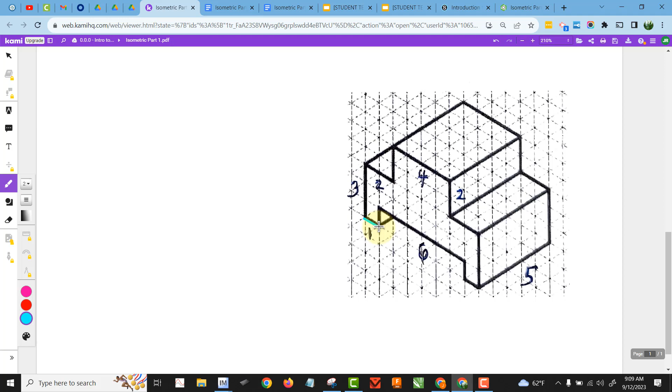Here's the first part we're going to make. It's shown drawn in an isometric view, and our strategy is going to be to make a two-dimensional sketch along the front face here. So we're going to come along here and we're going to draw this as I'm showing right now. And we're going to make sure it's the right size and has the right geometric characteristics, and then we're going to finish that sketch and we're going to extrude out this direction to get a three-dimensional structure. So let's go ahead and do that.

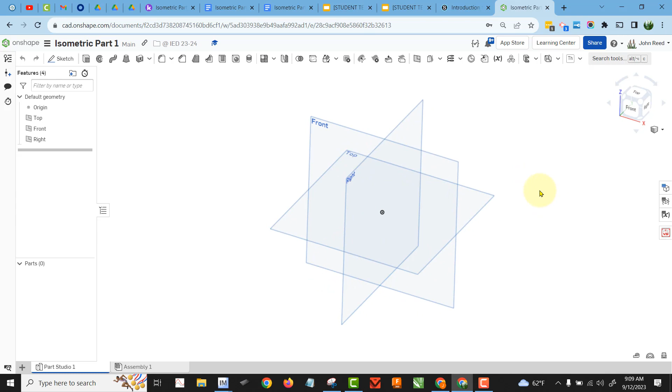So you should be looking at something roughly like this. This is our environment for starting. First thing I want to make sure I do is I come up here to these three lines here and click on workspace units, and I want to make sure that they're in millimeters. So once I've got that done, I can use a keyboard shortcut to get it back to the way it looks at the beginning. Shift 7 will put it in isometric view.

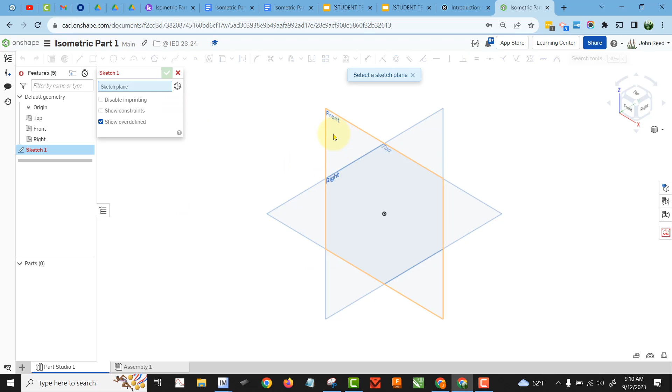So I want to come up here and make a sketch on the front plane, and now I want that plane to be flat. In other words, I want to be looking straight at it, and I can press the N key on the keyboard to have the plane looking straight at me. So let's go ahead and draw that. We can see that this is 1 centimeter here, and then I go up 1 centimeter, and then I go over 6 centimeters, and so on and so forth, and it's symmetric.

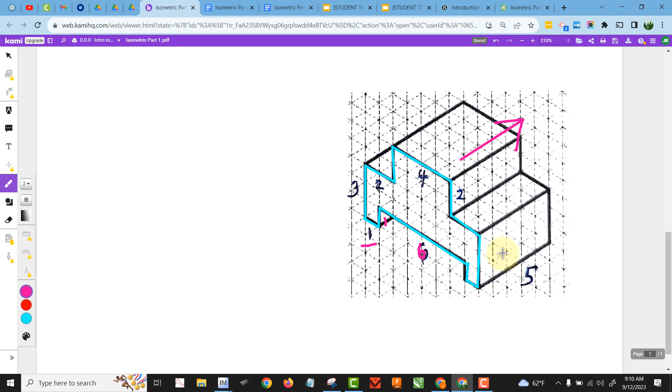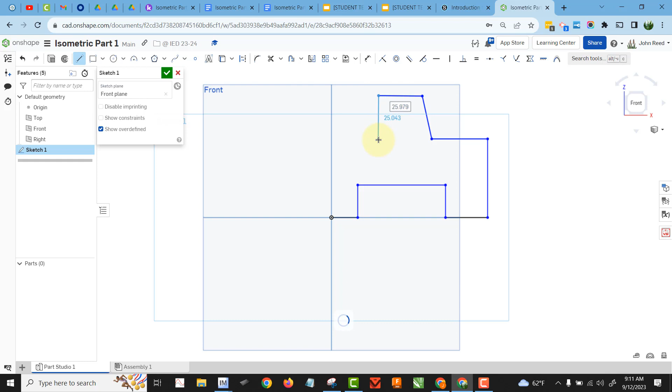So let me go ahead and just draw that using the line tool up here. So I'm going to click on the line tool. I'm going to start at the origin here, and I'm going to go over some amount here. I'm not going to worry about the dimensions too much. And as I draw, you can see these little lines appear adjacent to where my cursor is that tell me whether I'm horizontal or vertical relative to the lines that I just made. Let's make this one angled a little bit, and then maybe here, and here, and here, and here.

I'll right-click, escape line. So here you can see that the interior changed to gray. That means it's a fully closed two-dimensional shape, and I can do things with it. You'll also notice that all the lines, except for these two at the bottom, are blue, which means that they're unconstrained. They can move around. So what I need to do is to constrain all the different ways that this sketch can move around. And I can do that using two ways. I can use these things up here called geometric constraints. Those are very slick. Or I can use numbers.

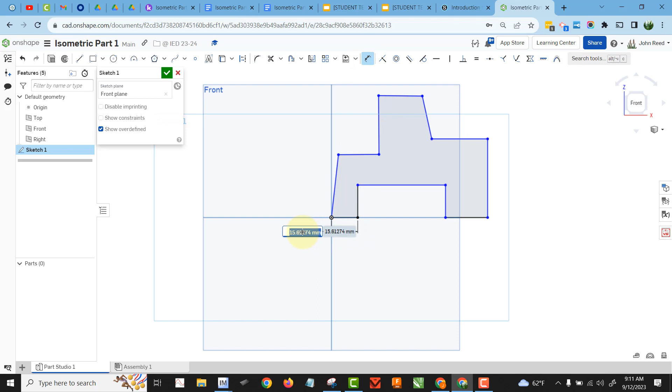I can click here, and then, for example, right here, I'm going to force that to be 10 millimeters, or 1 centimeter. And now some more of it turned black. And then I can come over here to the equal geometric constraint and click on that 10 millimeter line and this one here, and that'll force them to be the same size. And I'm pressing the keyboard letter D for dimension, and that gets me back to a dimension. I want to make sure this stays at 10 millimeters. So I'll do that one. And now I can use the equal geometric constraint again to make sure those are the same. All right. I think that was already forced because this was a horizontal line.

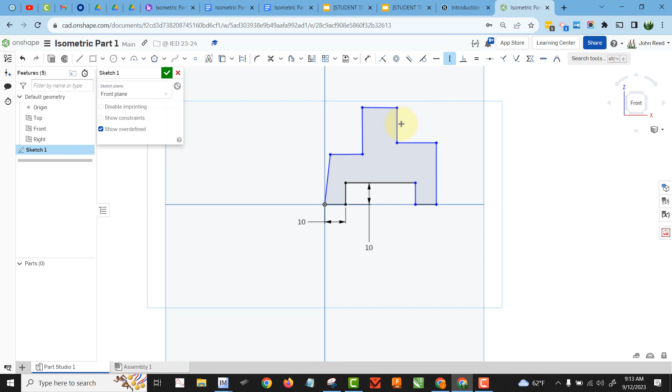Okay, here's a good one. So I want this to be vertical. If you look at the picture, we have vertical lines. So what I can do is come over here to the vertical geometric constraint, click on it, and then click on this line, and it'll make it vertical. And same for this guy right here. All right. And now, what about this one? So I believe there's one that is collinear. Where is that? Because I want to make this line here collinear with this line. There's an easy way to do that, but I wanted to just illustrate that. I don't see it here.

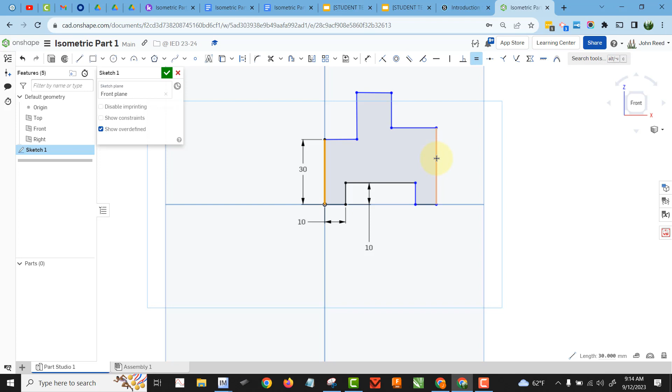Let's go ahead and I'm pressing D now on the keyboard to get the dimension back, and I'm going to make this, is this 2 centimeters or 20 millimeters? Let me make that 20 millimeters. Come back here. Oh, it's supposed to be 3. So I made a mistake. So I can come back here and I can double click there and change that to 30, like so. And now I can use the equal geometric constraint again to make this one the same as that in terms of length. Okay.

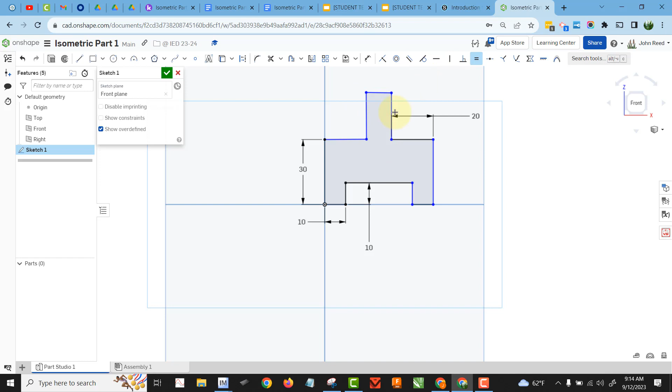Now what else? So this is 2. So these come in 2 on each side. Let's go ahead and put that one in. So I can either click here or press the D key. I'm going to make this 2 centimeters, and then I'm going to press equal for that one and that one. And you can see it's still not quite right. As you come back here, this only goes up 2, and I think we're up a little more than 2 here. So what I'm going to do is, again, press the D key on the keyboard for dimension, click here, and give this a dimension of 20.

Oh, that's not right. Oh, I know what I can do. I can use the horizontal constraint to make sure this guy is horizontal. Boom. And how about the, okay, still missing some things. How about this distance here is 2.

Is that what I have here? Yep, 2. Why does it not look correct? It looks too tall. What am I missing? 3, and it goes up 2. No? Yep. I think this distance here, I need to change to 4. So that distance is 4. Let's see what happens if I give this, press D, and then here, this is 4 centimeters or 40 millimeters.

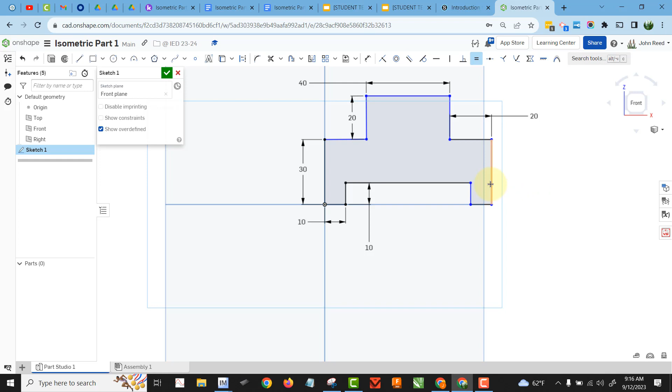There we go. You can see I've got a lot of blue here. So I think what I need to go through is just kind of make sure that that is the same as that. I think it already is. I don't think I've dimensioned that one in the bottom here. So this distance here, which is 6. Normally you wouldn't make this exactly like this. Press D, come here. You'd make this a little simpler, but I'm trying to illustrate how you can use constraints.

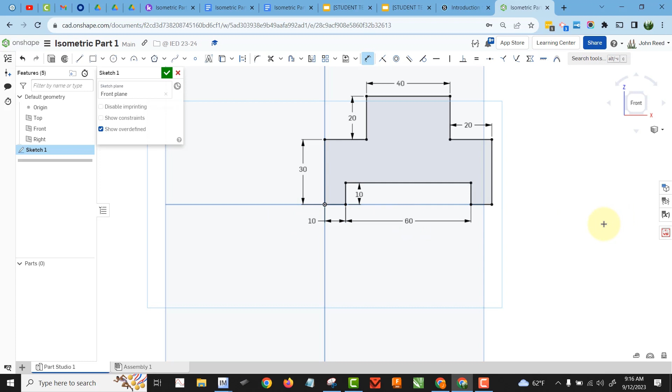Okay, so that was the last one. You can see it all turned black, which means that it is fully constrained, and I can make this look a little nicer, like this, maybe if I wanted to document this. And so there's my sketch. First of all, it's gray, so it's completely closed, which it must be. And secondly, all the lines are black, which means it's fully constrained. So now I can accept that sketch and move on to the next step.

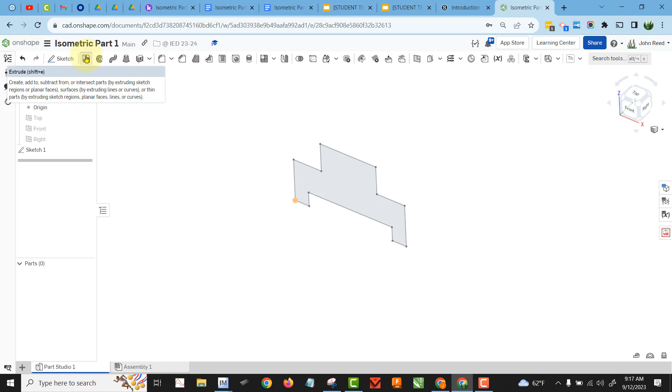And I'm holding down the right mouse button here, and I can move it around. I can press P to get rid of those origin planes. I don't really need those now. And yeah, I think that's correct. So now we're going to come up here to the extrude command. And what the extrude does, if you click on a closed 2D sketch, it will extrude it. It'll move it in the third dimension.

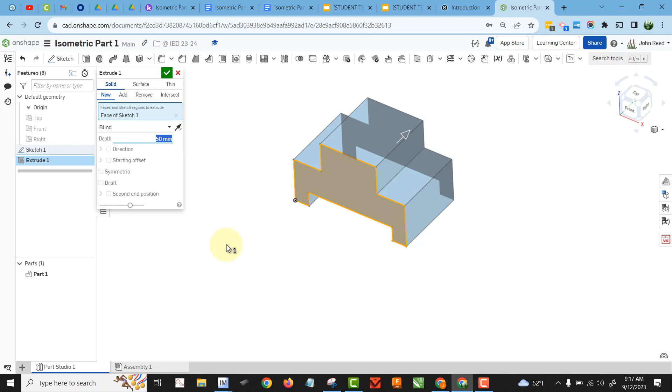We can take this little arrow and we can move it back. I'd like to extrude that way. And let's see how far we go. So we go 5 centimeters in the third direction, or 50 millimeters. 50, enter. And we'll accept that. And Shift 7, we'll put it in a nice isometric view. And there's our part. And before we go any further, let's rename this part.

I think this one is Isometric Part 1. So that's the part name down here. This is a part studio, and we're going to talk about that in a little while, of why I have to rename this again. So a part studio and a part are not the same thing. So Isometric Part 1, I think I asked you to do that.

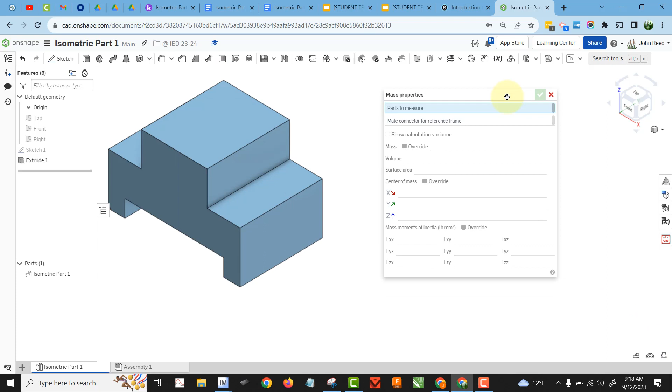Now let's see if we made this correctly by coming down here to the Display Mass Properties. So I've clicked there. I'll move the Mass Properties window out of the way, and I will click on it, and it will tell me the volume and the surface area. So usually we'll take a look at the volume, and if it's equal to what it should be, then you know you've made this correctly. Now, if you may have missed it, it did say that one thing wasn't defined, and that is, what is this part made of?

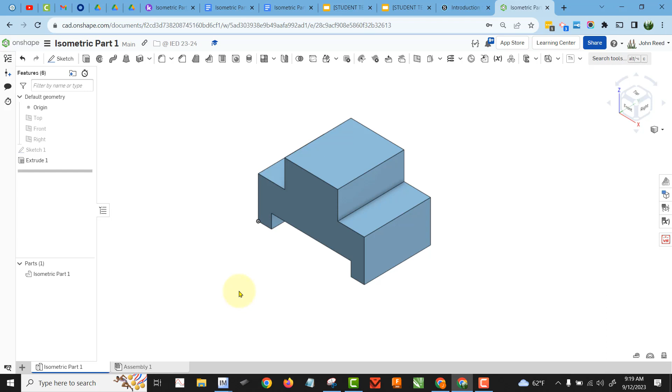So we can come over here to the part, right-click, assign a material, and in this little box here, you can type ABS. This is going to be ABS plastic. So now it's got a certain density and all that stuff. So if I come back to the Display Mass Properties and click on it, it'll tell me now what the mass of this thing is. It uses the density combined with the volume to get that, and it also shows me the center of mass, which you can see is right in the middle.

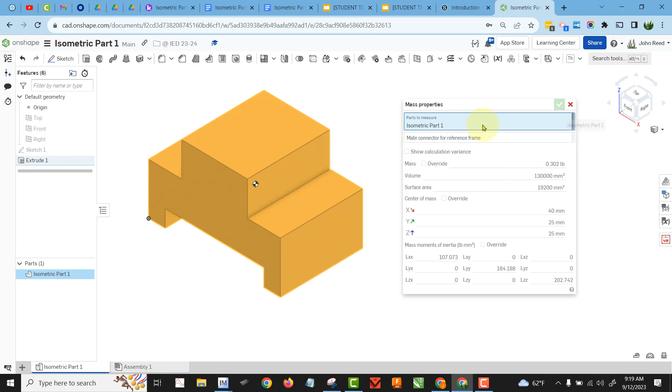So I hit Shift 7 to get this in isometric view, and I move it aside so it's not obscured by the Mass Properties window. And first I'd like for you to make this thing not be yellow. So to do that, you just have to get off this, so you can click below it like that, and it'll go back to its regular color. So this is the point where I want you to get a screenshot of everything.

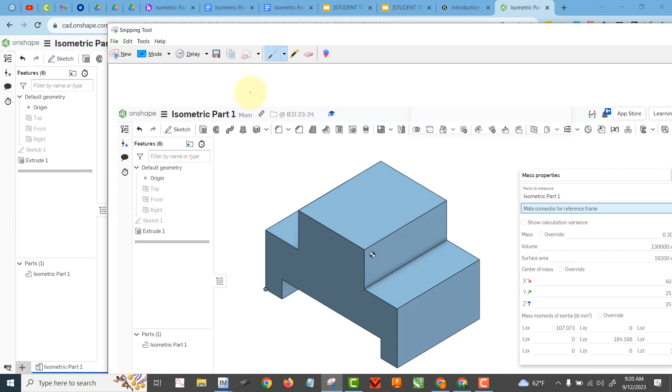So this is a screenshot, and you can see that my name is up there, the name of the file, the name of the part and the part file, and that's what you want to paste into the slides document after you have completed this.